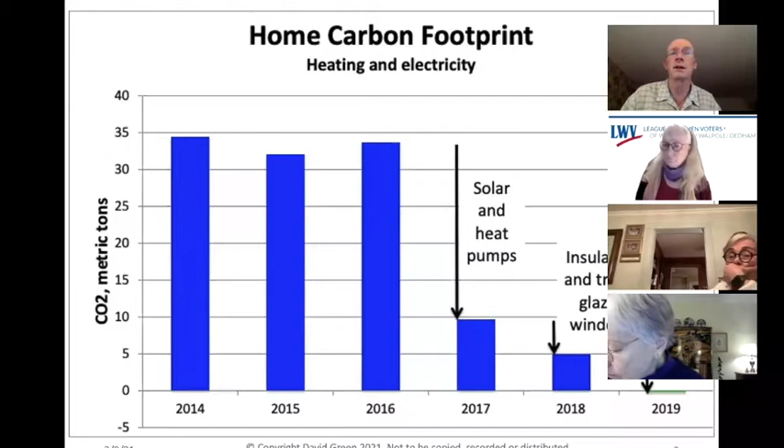Let me show you what happened to our heating bills. The previous chart was the carbon footprint, very similar, about $11,000 in the early years, and then with the heat pumps and solar panels cutting it by two-thirds in 2017, again by almost half in 2018, and again it went slightly negative in 2019 because the value of the solar electricity I'm exporting to the grid now exceeds the amount I pay for that small amount of heating oil.

So that's 35 tons gone each year, every year, forever. And $11,000 in my back pocket each year, every year, forever. And that 15% return on investment is forever as well.

Now, you may be wondering, as Claire mentioned, I live in Dover. Dover is a very wealthy suburb, and I have a big house. Is this going to work for me? And the answer is yes.

I have one homeowner who I've been helping cut his carbon footprint, and he's earning a much better return on investment than I am - 46% per year, and he's cut his carbon footprint 38%. This man lives alone in a small house, about 1,000 square feet, on a small income. So this approach works on all houses at all income levels.

So this is big, it's transformative. This delivers the triple bottom line: for the people, because you can cut out asthma; for the planet, you can cut out global warming and the pollution; and the profit for your own back pocket, making money rather than paying money on electricity and fuel bills.

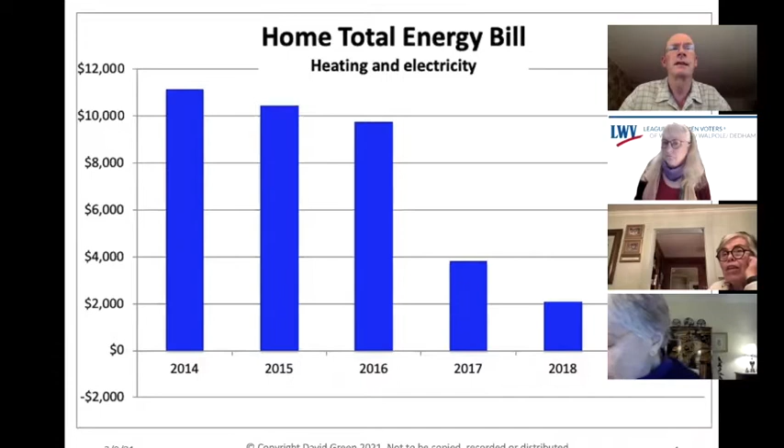So a bit of background - Claire gave you a bit of introduction. I have a degree in physics from Oxford University. I'm a Brit, if you can't tell by my accent. I have an MBA from Harvard Business School, and that's why I came to the States and met this girl and fell in love and been here ever since.

And in my career, I founded and was the CEO of 2 different biotechnology companies. I took both of those companies public. I say all this to let you know I have both the scientific understanding from physics to understand things like the low temperature performance of heat pumps and the low-E coatings on triple glazed windows. I actually understand these things.

And then the financial investment experience to understand things like return on investment and net present value and other things people use to evaluate investments - like all of these, you spend something up front, you get some benefit in terms of savings into the future.

Now, what happened, unfortunately, I was in a very nasty road accident in the summer of 2014. It nearly killed me. And it was while I was at home recovering from that accident that I did the research on cutting my own family's carbon footprint.

Now, both my house and my swimming pool have zero carbon footprints. I'm saving over $11,000 a year on the house and $3,000 on the pool. I wrote one book about each: Zero Carbon Home, Zero Carbon Pool.

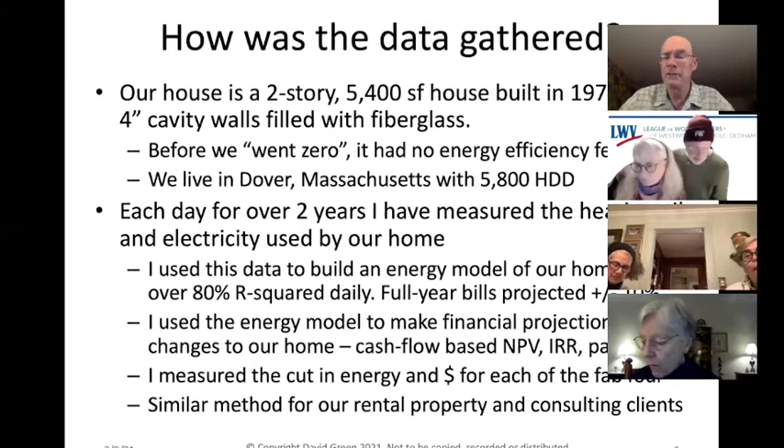So you may be asking, why now? This is kind of odd, having this conversation. We've been talking about this for 40 years now. Well, I think it's very simple. The technologies involved, like insulation, heat pumps, solar panels, and triple glazed windows, have all got substantially better in even the last few years. And the subsidies from government are very significant. So by following these examples, you can cut the carbon emissions from your home to zero, save thousands of dollars a year on heating and electricity bills, and make a good return on your investment.

We have done it. And just in case you're interested, this works on new houses too. I'm working with developers and architects now to develop new houses that will also have a zero carbon footprint and zero utility bills. But most of my talk this evening is going to be on existing houses and what you can do with them, not on new construction.

So how did we cut our carbon footprint to zero? We installed the Fab Four: heat pumps, insulation, triple glazed windows, and solar panels. It's easy to remember because the real Fab Four, the Beatles, had lots of HITS: heat pumps, insulation, triple glazed windows, and solar panels.

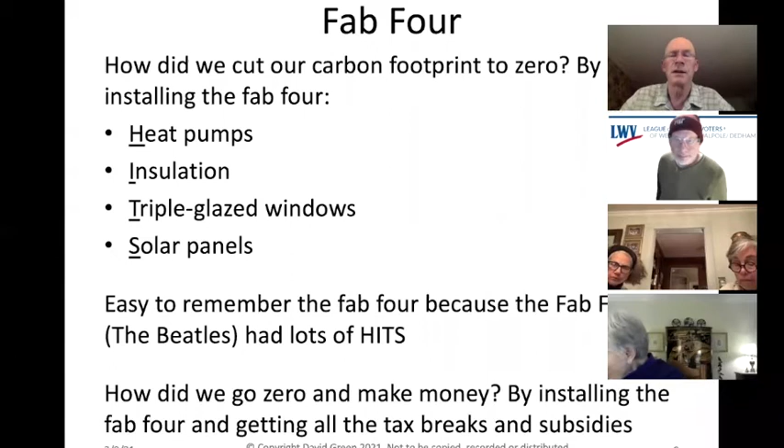So how do we go zero and make money? We installed the Fab Four, and we got all the tax breaks and subsidies. I'm going to go through this one by one, and at the end of each section I'll take a couple of questions from the chat box via Claire. At the end, we'll open it up for live questions and answers, and I'll stay on as long as it takes to get everybody's questions answered.

So these are the results for our heat pumps. This was the biggest single contributor to cutting our carbon footprint, almost cutting it in half, saving us about $3,000 a year. The total investment was about $26,000, paying for itself in about 9 years. That's a return on investment of about 9%, and that's 9% after tax.

To compare this to a stock market or bond market investment, which is taxable income, you'd be looking at an equivalent investment of maybe 12%, 15%, or even 18%. This is clearly a very good return on investment compared to investing in the stock market.

In addition, an article published in Nature Energy, one of the most important academic journals in the energy field, just last year, showed that by comparing similar houses, some with heat pumps and some without, they could determine the price premium for having a heat pump. It turns out that's about 4 to 7%. This is often more than the cost of installing a heat pump, which means you no longer have to wait that 9-year payback period to get your money back. You can get it back as soon as you sell your house.

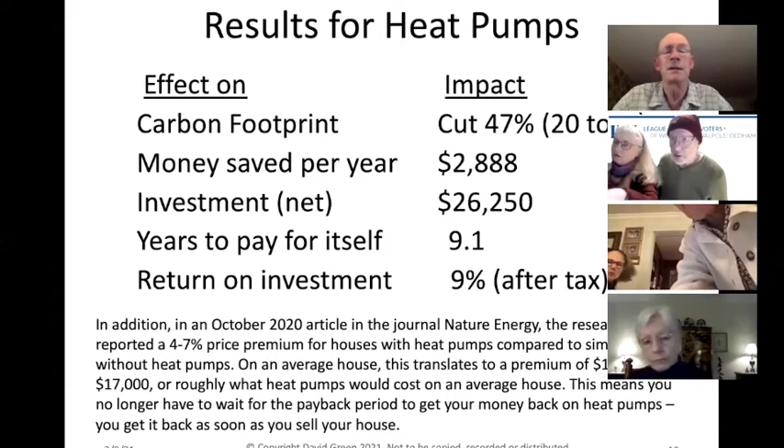So this is a picture of our heat pumps. If you're thinking, well, they look just like our air conditioning units, you're right, they do. And they do air condition as well. These cool my house in the summertime, but in the wintertime the circuit is reversed, and instead of pumping heat out of the house, they pump heat into the house. I'll show you how in a minute.

When they're in heating mode, they heat with 2.5 times the efficiency of a furnace or a boiler. Doesn't matter if the furnace is natural gas, heating oil, or propane, heat pumps are 2.5 times as efficient. They cool with the same efficiency as an AC unit, so there's no benefit there, but it's when they're heating that the magic kicks in, and you get that 2.5 times benefit compared to burning a fossil fuel.

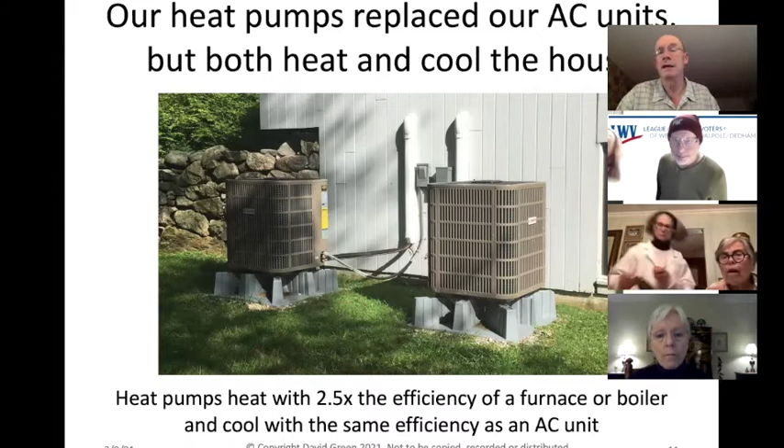Let me explain how heat pumps work. This is sometimes confusing to people, but it really doesn't need to be, because everyone is already familiar with heat pumps, since your refrigerator is one. What your refrigerator does is move heat from inside the refrigerator to outside, where the kitchen is. If you put your hand down the back of the refrigerator, you'll find it's warm. That warmth is the heat that was in your milk, removed from the milk, cooling it down, and dumped out the back of the fridge and dispersed to the kitchen air by that long coil of black metal pipes at the back.

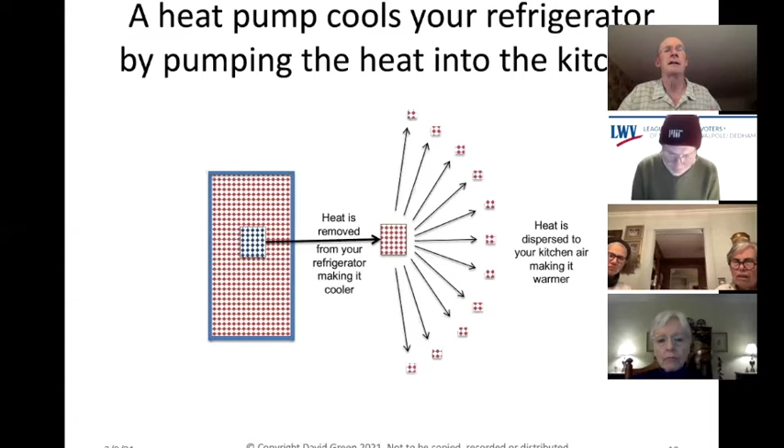It might be 70, 75 degrees inside the house because you've cooled it down to that temperature, but over the condenser unit of the air conditioning unit outside, it may be 110 degrees. It's really hot, because that's the heat that was in your house that's been moved outside by the heat pump, and that heat is then dispersed to the outside air. That's how the heat pump, known as an air conditioning unit, is used to cool your house in the summertime.

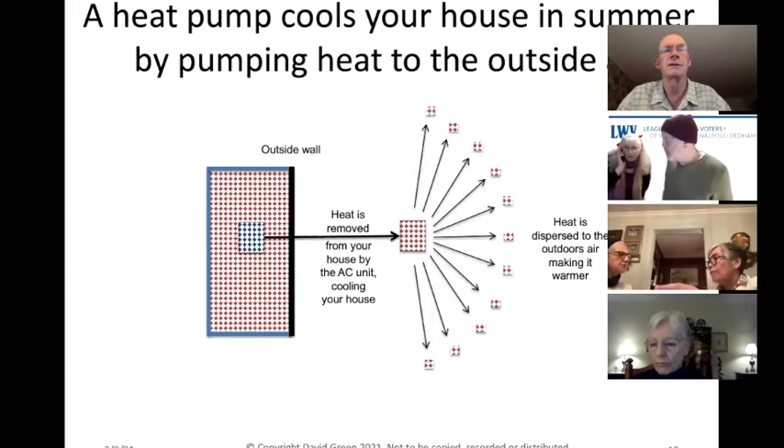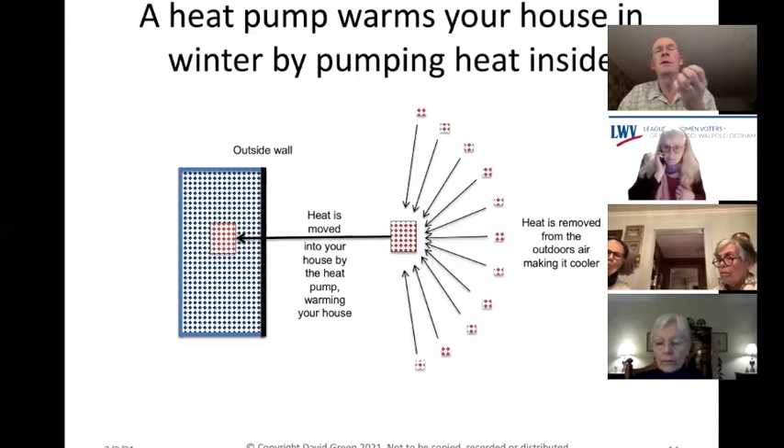Now in the wintertime, just imagine reversing that circuit, and instead of cooling your house down, it cools down the outside air, making it colder still, and putting that heat into the house. This is a heat pump working in the wintertime to heat your house up. So this only works because it cools down the outside air. This is a little bit counterintuitive, because the outside air is already cold. So if it's cold, people think, well, how can there be heat in it? Well, there is a lot of heat in it, and you can remove it, but only by cooling down further that outside air.

So if you look at this picture, that's me on the left with an infrared thermometer, and I'm measuring the temperature of the air going into the heat pump in the wintertime. You can see it's a very cold winter's day, 4.7 degrees Fahrenheit, very very cold, and there's snow on the ground. I'm wearing skiing gloves. Now on the right-hand side, you can see I'm measuring the temperature on the outlet side, above the heat pump, and it's a stunning minus 19.6 degrees Fahrenheit, unbelievably cold. In fact, if you were to put your hand over this, you would get frostbite.

So that's how you can see the air, even though it's cold, is being cooled down further still by the heat pump, and taking the heat from that air and pushing it into the house, making the house warmer on the inside. This is how heat pumps work to heat your house in the wintertime.

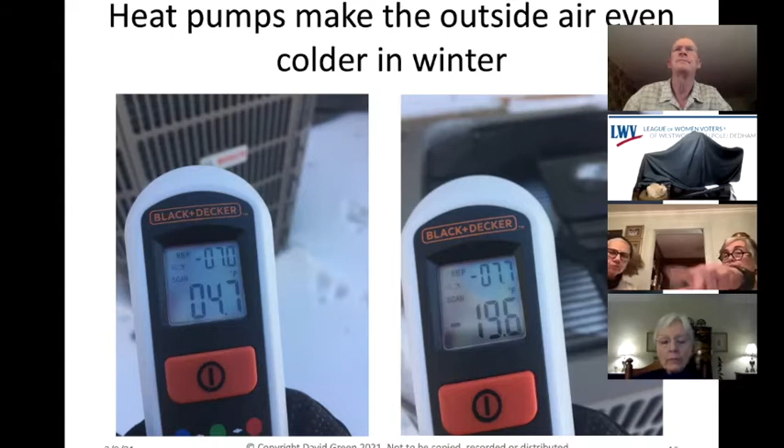Now that was a ducted system, so our house has ductwork that already existed prior to putting in those heat pump units. And this is now showing our rental property in Dover, which did not have any air conditioning at all. So we fitted air conditioning, but not by adding ductwork, which would be very expensive on an existing house.

We added it with what's called a ductless mini split heat pump unit. You can see the outside unit here on the left, and on the inside, it's a ceiling mounted unit. These are often mounted on the walls or sometimes on the floor. I paid extra to have these ceiling mounted units because I think they look nicer, but it's as simple as that—you can get them to mount on the wall, on the floor, or in the ceiling.

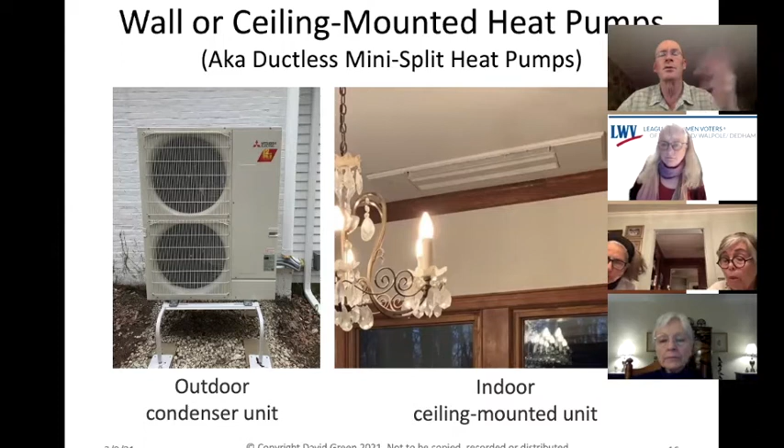I do not recommend geothermal. Geothermal is sometimes known as ground sourced heat pumps. The heat pumps I was describing are air sourced—they take their heat from the air outside. Geothermal will cut your carbon footprint, no doubt, but they're too expensive compared to air source heat pumps. We had a quote for geothermal on our house—it was $98,000 compared to the air source heat pumps at 25,000, so 4 times the cost. Even though they are somewhat more efficient, they're not efficient enough to compensate for the high upfront cost.

Now air source heat pumps—I mentioned at our house we have ductwork to circulate the air, so it's a forced hot air system. At our rental property, we have those ceiling mounted units which circulate warm air around the house. If you don't have that, if you have radiators and forced hot water, you can still get a heat pump to heat the water going around the radiators. It's just from a different manufacturer, that's all.

And they will also work for swimming pools. I have a heat pump for my swimming pool—it greatly cut down, in fact cut down to zero, the amount of propane we've been using to heat the swimming pool. And also for your hot water tank, you can now separate your hot water tank from your heating the air system, from your furnace.

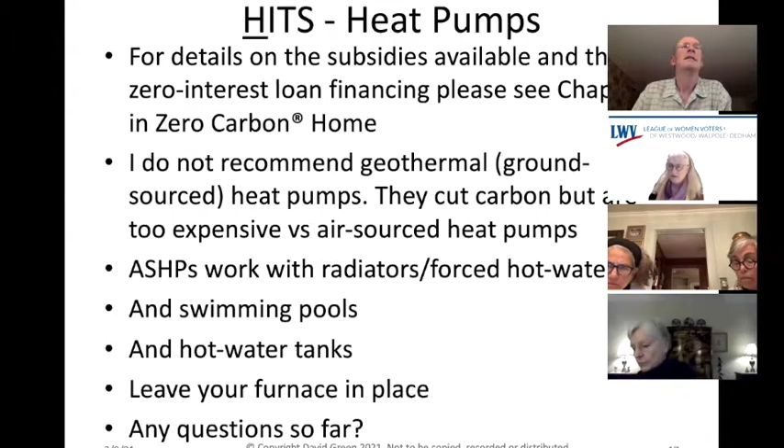So the second section after heat pumps is HITS - it's the insulation in your house. Insulation had a big effect; it cut our carbon footprint about 16%, or 7 tons of carbon dioxide.

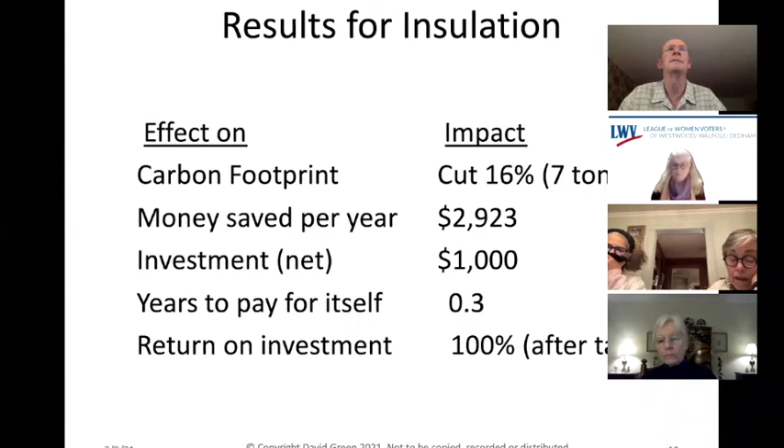And of course, the electric vehicle will cost you $50,000 or something like that, but the insulation cost me $1,000, and it could even be free for you if you're using MassSave. So this is what we did on our house.

We have a flat roof, not a sloped roof, and you can see here the insulation on the roof. There's 10 inches of fiberglass, that's about R30. Insulation is measured in R values, and more is better. Plus 2 ISO boards, those yellowish foam boards on top. This is basically spray foam in a board, you can just nail it down to the rafters, it's very easy to install. That 4 inches is about R20, so a total of R50, which is a very well insulated roof.

On the right-hand side, you can see the ceiling of our basement, where I installed the fiberglass. I just pushed it up in between the rafters there. It stays by itself, it just is squished in between the rafters, so it just sticks there. I put 12 inches in, that's about R38. This is what I bought from Hopkinton Lumber, they actually deliver, which is very nice. And it cost me about $1,000 and cut out most of the heat leaking from the house down to the basement.

That made the basement colder, about 8 degrees Fahrenheit colder, because I'd now insulated the ceiling of the basement, which is totally fine because our basement is not living space, it's storage space. If you have living space, you do not want to insulate the ceiling. You want to insulate the walls and the floor, which is a bit trickier. You may want to hire a contractor to do that, but adding insulation to the ceiling is very easy. I did this myself.

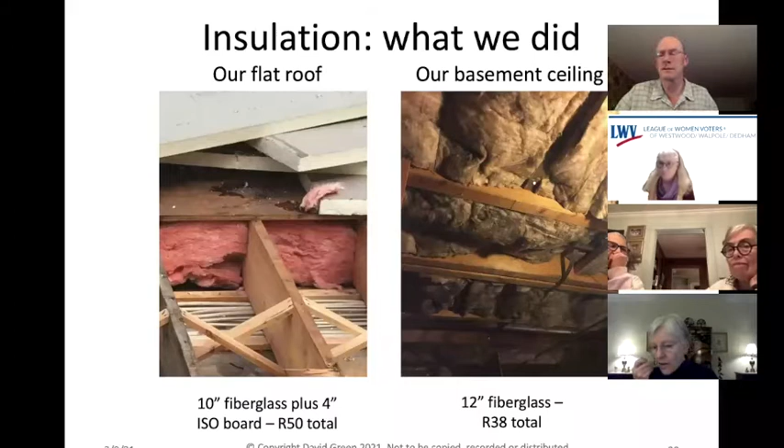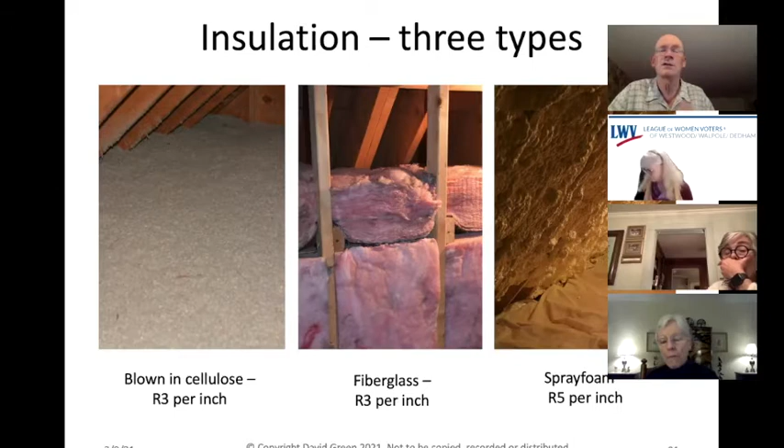Now, it's not the cellulose in blown-in cellulose, it's not the glass in fiberglass, and it's not the plastic in spray foam that insulates. It's the air. Air is a great insulator, and trapping air, just like putting on a big coat in the wintertime, keeps the heat inside your house as well. Now, one thing that people often don't understand is insulation is just as important on hot summer days as it is on cold winter days. Insulation stops the heat from escaping in the wintertime, and it stops the heat from getting in the summertime. So using more insulation actually reduces your electricity bill in the summertime because of the need for less air conditioning, as well as saving on the heating bill in the wintertime.

Now, let me just talk a bit about air sealing. This is basically blocking drafts in the house. Most clients need air sealing. Our house did not need a lot because it's a very airtight construction, mostly because it has a flat roof, and the flat roof has a rubber membrane, which is airtight as well as watertight.

So air sealing can cut your energy use by almost a quarter. This is the experience many of my clients have had. Many of my clients have typical shiplap, overlap siding, or cedar shingles or shakes, and those are very leaky, very drafty, and an average house can lose up to 30% of its heat through the gaps and cracks in those walls. And a major academic study found that insulating the attic in row houses cut the energy use 8%, but insulating and air sealing cut it 18%.

So most houses are going to need air sealing and insulation, just our house did not. So I definitely recommend that you do air sealing at the same time as you do insulation. Most MassSave contractors will do both at the same time, they'll come and do the installation for you and do the draft sealing.

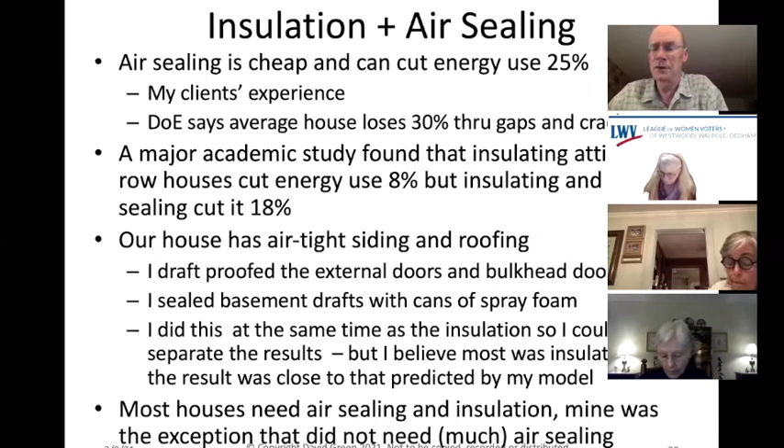MassSave, I mentioned, this is actually out of date. They used to pay 75% of the cost up to $2,000. They now pay 100% of the cost up to $2,000. So please go out and get your houses insulated, and ask them to do the air sealing too.

This is a picture of peaches on my peach trees in the summertime. You can see they're so ripe they're weighing down the branches almost to the ground. This is the lowest hanging, ripest fruit in the zero carbon garden, so please pick it by the bushel.

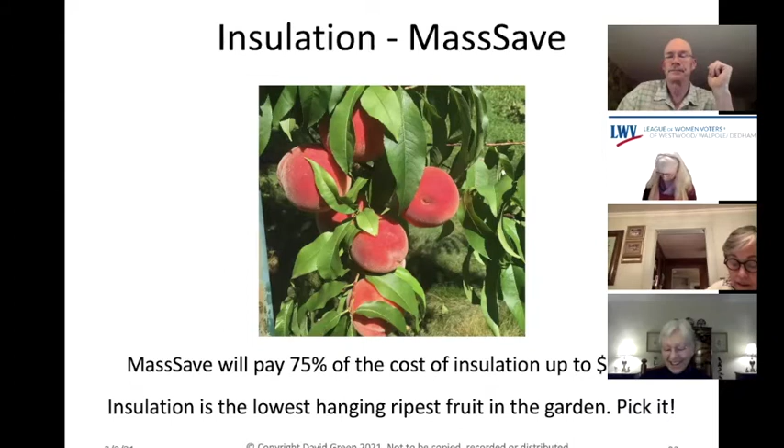MassSave, by the way, will pay for both basement and attic insulation. Sometimes you have to prod them - they tend to want to get in and out as fast as possible, and they'll just put spray foam or blown-in cellulose in your attic, but they will do the basement as well. Just make sure you point them towards doing that.

For details of which types to put where, just see this in the book - you'll all get this at the end of the call. If you're not living in Massachusetts, please go to dsireusa.org, where incentives for insulation are listed state by state. So if you live in Arizona or California and you're on the call tonight, please go there to find out what the incentives are in your state.

Now, I do not recommend taking off your siding, thickening the walls with insulation, and replacing the siding. This is actually quite popular in the deep energy retrofit or zero carbon community. It will cut your carbon footprint, just like geothermal will, but just like geothermal, it's too expensive compared to insulating your attic and basement. So walls are often a bridge too far. There are occasions when you can insulate your walls.

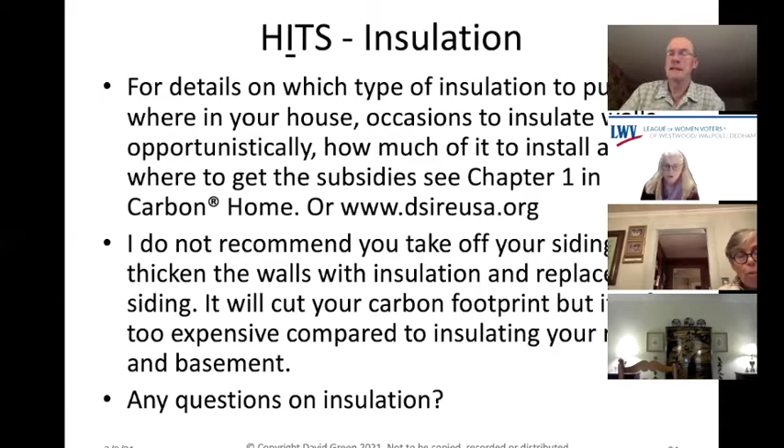Let's carry on then. So T, the T in HITS, triple glazed windows. Triple glazed windows cut about 5% of our carbon footprint and about 2 tons of carbon dioxide, saving us about $1,000 a year and costing about $4,500.

Now this is not the full cost of triple glazed windows. Our windows were ancient and falling apart, I'll show you them in a few minutes. There were literally 1-inch gaps between the window and the frame.

Our decision was whether to replace our windows with double glazed or triple glazed windows. So this $4,500 is the additional cost, the incremental cost, of replacing them with triple glazed windows rather than double glazed windows.

The full cost of replacing windows is not going to pay back for decades on the energy bill. Windows are very expensive. But if you are in a situation where you need to replace your windows, then replacing them with triple glazed makes very good economic sense compared to double glazed.

If you've got perfectly good windows, do not rip them out. It's not worth it. There's something else I recommend instead.

You can actually add a panel of glass from the inside called a window insert, which will make your window effectively a triple glazed window without having to spend the money to rip out your perfectly good double glazed windows. These pay for themselves in about 4 or 5 years, with a return on investment of about 19% after tax.

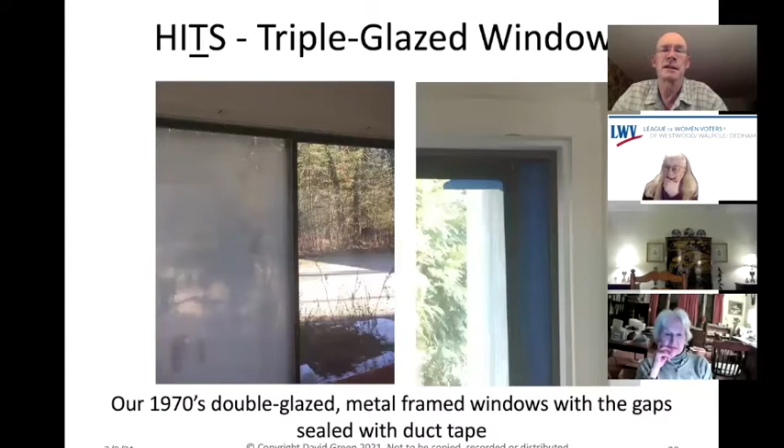So I hope you'll agree the new windows look much better than the old ones, including being able to see out and see the garden, which we couldn't do before because the old windows were all misted up.

So let me explain what a triple glazed window is. A single glazed window is just a single pane of glass, one sheet of glass. Double glazed is 2 sheets of glass with a half-inch air gap between the two. That over doubles the insulation value of the window, halving the amount of heat lost and the dollars being lost through that window. A triple glazed window has 3 panes of glass with 2 half-inch air gaps.

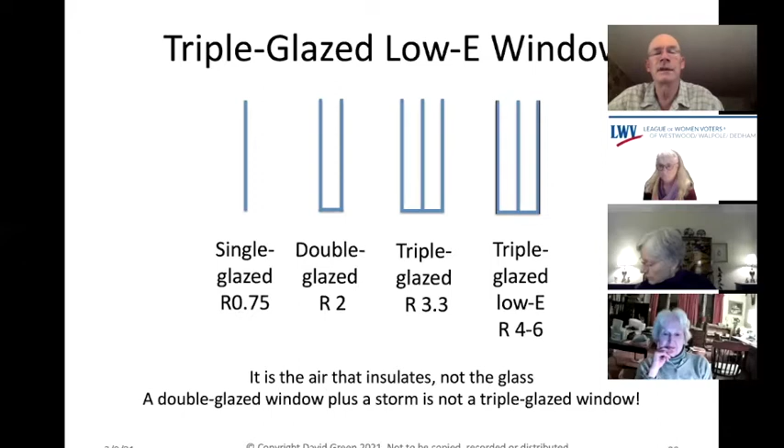In addition, I would get the argon filling. You can often get these windows with either argon or krypton. Krypton is too expensive, it's not worth the additional money, but argon is well worth it over just an air gap. Just remember, like with the insulation I showed you earlier, it's the air that's doing the insulation, not the glass. A double glazed window plus a storm window is not a triple glazed window. In order for it to really insulate, the air has to be sealed, the air has to not move. So a triple glazed window where the draft can blow up the back of it is not a triple glazed window, if you've got a storm window on the outside of a double glazed window.

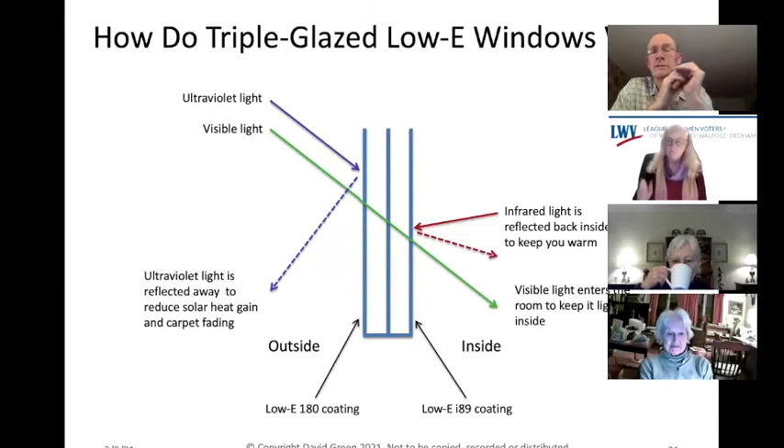Now, that's if your windows are being replaced. You really want to replace them with low-E triple glazed windows, not double glazed windows. But if your windows are in good shape, here's a better solution for you.

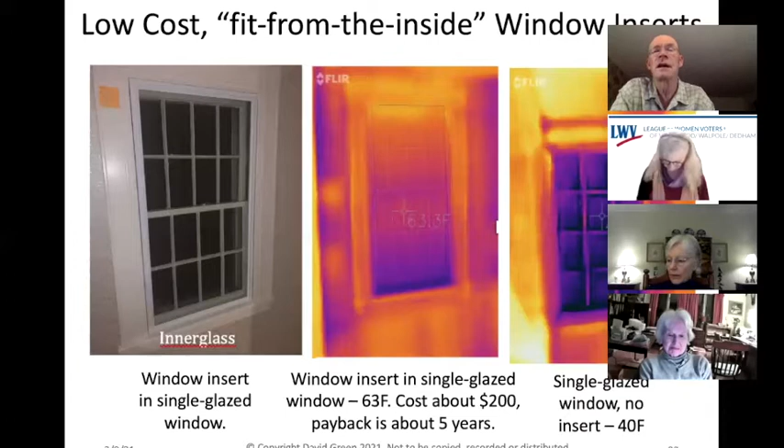So these things are very good value for money. They're only about $200. They pay for themselves in about 5 years, and the difference in blocking the drafts and improving the comfort of the room is considerable.

So for details on triple glazed windows, it's all in the book, including the zero interest loans. And if you're not in Massachusetts, you can visit this website where all the subsidies are listed state by state.

Now, I do not recommend that stretchy plastic film. You've probably seen the stuff. You can buy it at any hardware store. You tape it up with double-sided tape and then use a hairdryer to stretch it out flat. It does work. It definitely reduces the drafts and improves the insulation.

But when you come to take it off, I found the paint comes off with it. If only the paint comes off, that's bad. What happened to me was much worse - the plastic tape came off in my hand, leaving a strip of glue on the window frame. So I now have a nasty, sticky yellow strip of glue on my window frames that I cannot get off, and it's just collecting ants and flies and ladybugs that crawl across it and get stuck.

So I do not recommend that stretchy plastic film.

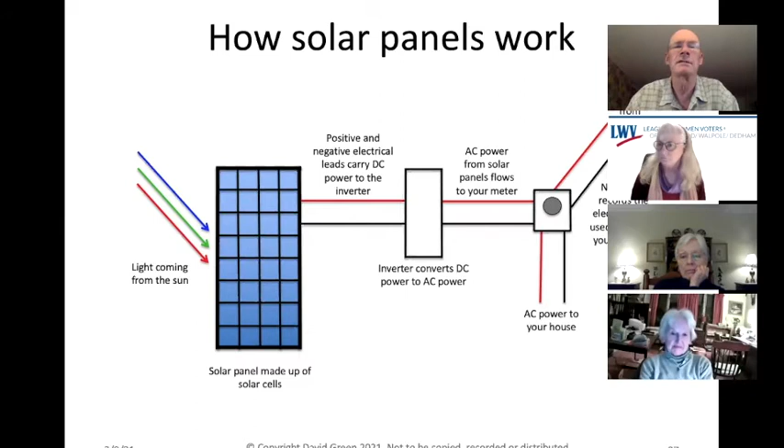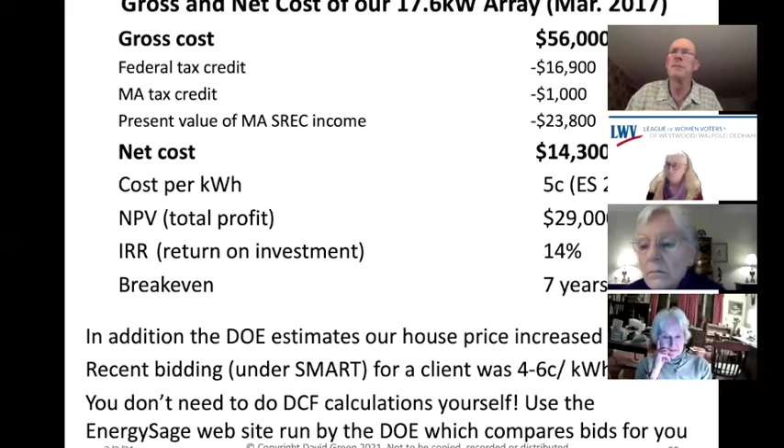I definitely recommend using the EnergySage website. The National Renewable Energy Lab, which I mentioned earlier with their studies on heat pumps, documented a 10 to 20% saving using the Energy Sage website compared to calling contractors one by one.

For details on the lease, loan, and cash purchase options, this is all in the book. Again, if you're outside Massachusetts, if you're in Phoenix, Arizona for instance, go to dsireusa.org.

I do not recommend solar hot water panels. These are quite common in the zero carbon or green building community. This is where the sun's heat is used to heat up the water. The problem with these is they give you massive amounts of hot water in the summertime, right when you don't need it, and no hot water in the wintertime, right when you do need it.

Compared to having solar photovoltaic panels, which produce power all year round, even in the middle of winter, that are feeding a heat pump water tank with its 4 times heating efficiency compared to a fossil fuel furnace, it is much better to have a few extra panels on your roof and have a heat pump water tank as well as the heat pump for heating your house.

Now, for batteries, if any of you are interested, batteries are a very new area. You now get a subsidy under the SMART scheme for a battery. As I mentioned earlier, I'm replacing my backup generators with batteries because the subsidies are now so good that if you install them with an array, the extra subsidy for the battery makes the battery almost free over its lifetime. So batteries are very good value for money right now because the subsidies are so good.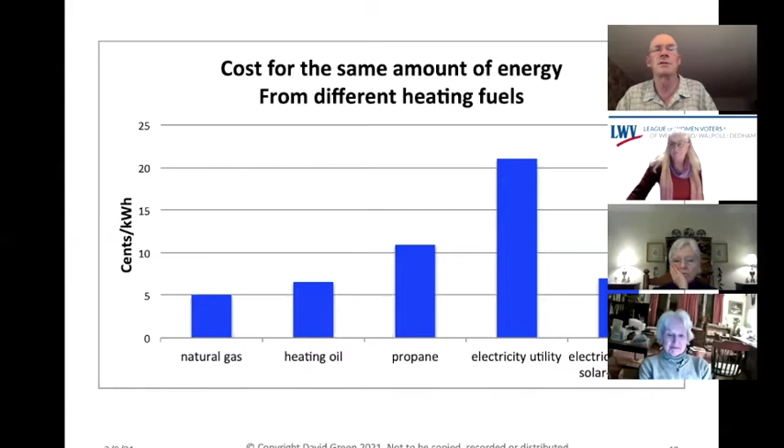So putting it all together, let's look for a minute at the cost of heating your house using different heating fuels. Everyone knows natural gas is the cheapest, heating oil is a bit more expensive, propane is a lot more expensive, and heating with direct resistance heating, like a fan heater or an electric baseboard heater, is the most expensive because electricity is 21 cents per kilowatt hour. And even if you use solar electricity at 7 or 8 cents a kilowatt hour, it's still more expensive than natural gas.

Unless you use that solar electricity to power a heat pump. Remember, the heat pump heats with 2.5 times the efficiency of an electric resistance heater or a gas or oil-fired furnace. So now you're heating your house at maybe 2.5, or maybe less than 2 cents per kilowatt hour of heat in the house. So for the same amount of heat in the house, it's now costing you less than half what it costs to heat the house with natural gas.

So while natural gas has historically been the cheapest way to heat your house, now it's different. Now solar panels on your roof plus a heat pump to heat your house is the cheapest way to heat your house, at less than half the cost of heating with a fossil fuel furnace. This is how we heat our house today, and this is a big part of why our carbon footprint has gone down to zero and our bills have gone down to zero too.

Now, in addition to all of that about money and carbon footprint, if anyone in your house has asthma, then replacing your fossil fuel furnace with a heat pump will greatly improve the indoor air quality. Because even when you have a properly vented furnace, there's still a little bit of burnt gas in the air in the house, which you're then breathing in. Now, if you're cooking on an induction stove, that will also greatly reduce the amount of particulates, nitrogen oxides, and sulfur dioxide in the house. And our indoor air quality is measured using a sensor.

It's from a company called Foobot, F-O-O-B-O-T, costs about $100, and our air quality is consistently excellent. We have an induction stove, and we have no combustion of fossil fuel in the house because of the heat pumps for heating and the heat pump for the hot water tank as well.

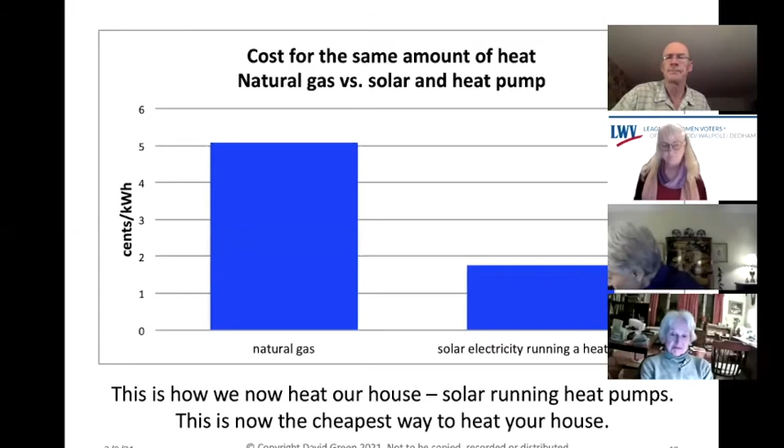Now, that was the cost. What about the carbon footprint? The carbon footprint of natural gas, heating oil, and propane is all about the same, about half a pound of carbon dioxide for every kilowatt hour of heat. Utility electricity is a lot higher because the grid here in Massachusetts, we still burn oil and natural gas to make the electricity.

But of course, solar panels have a zero carbon footprint. So solar panels running a heat pump is now the cheapest way to heat your house, at half the cost of natural gas, and it has a zero carbon footprint.

Let me take a bit of an aside here. Gasoline is also too expensive now to compete with solar panels and electric vehicles. Just yesterday, my wife and I drove to New York City and back. Our daughter's at Columbia University, and driving our Tesla, which we bought a year ago, cost me $8 for the round trip. That's because my solar panels generate electricity at about 8 cents a kilowatt hour. The Tesla gets about 4 miles for every kilowatt hour, so about 2 cents per mile. My BMW, which it replaced, is about 15 cents per mile.

A huge cut in the cost of driving. Even the Greyhound bus costs $26 to go from Boston to New York and back, and that emits carbon dioxide and pollutants every mile of the way, whereas the Tesla emits nothing. And so I really believe it is game over for the internal combustion engine. It's been nice knowing you. It's powered the Industrial Revolution for 100 years, but it's now destined to go the way of the horse and carriage.

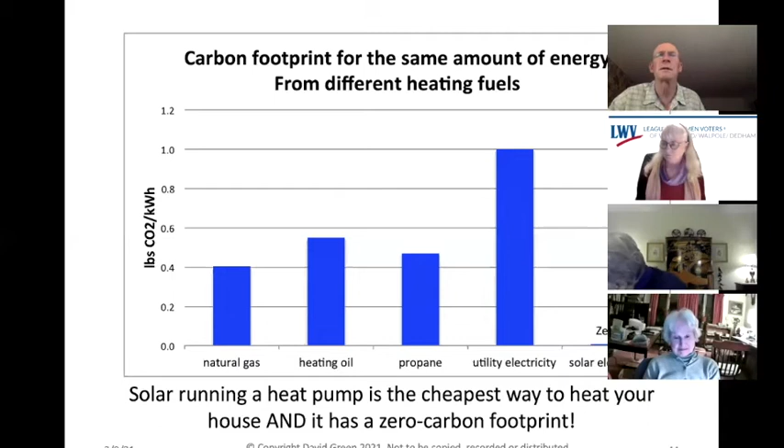So the key to going zero is to cut your house's energy use so much you can generate it all with solar panels from your roof, including the power needed for an electric vehicle if you have one. So you cut it with insulation and air sealing, triple glazed windows, heat pumps, and then you generate it with solar panels on your roof.

This, by the way, is the optimal order. You may remember at the start we did it almost the opposite way around. We had solar panels and heat pumps first, then triple glazed windows, and insulation was the last thing we did. But the better way is: insulation and air sealing first, triple glazed windows second, heat pumps third, and then you'll know how big to make your solar panel array to get to a zero carbon footprint.

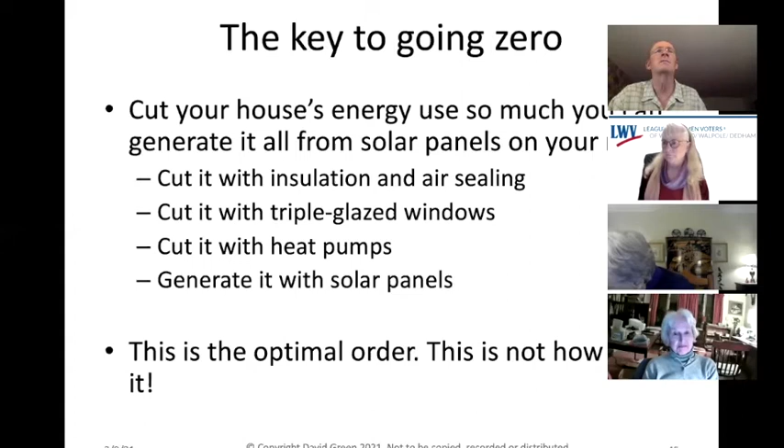Now let me take a quick aside on health. This shows the greenhouse gas emissions and the death rate from accidents and air pollution by different types of fuel. At the top, coal, oil, natural gas, and biomass all have very large greenhouse gas emissions causing global warming, and very high death rates from accidents and air pollution. Look at the bottom four: hydropower, nuclear, wind, and solar—almost negligible. There's almost no greenhouse gas emissions from any of these, and almost no deaths from industrial accidents or air pollution.

So this health benefit of cutting your carbon footprint and cutting your bills—the health benefit is an additional benefit on top of those two as well.

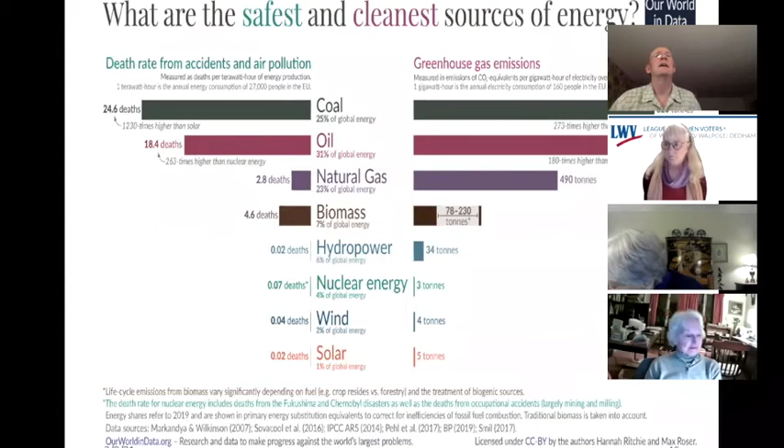Now, the journal Nature, the world's top scientific journal, stated in an article that more than 5 million deaths per year are due to air pollution. So it's not just about cutting carbon footprints and cutting bills, it's also about the health of you and your family. Okay, let me get off my soapbox and get back to saving money.

So let me summarize where we've been today. These slides are in the book, so you don't need to write it all down. The total savings were over $12,000 a year, and over 43 tons of carbon dioxide per year. These charts are in the book. So you really can save money while helping to prevent global warming and improve your health as well.

Now, this was very clearly illustrated during the COVID lockdown. In the UK, the British Lung Foundation surveyed a bunch of people—2 million people experienced improved lung function because of the reduced pollution from burning fossil fuels during the COVID lockdown. So if cutting carbon footprints was a drug, it would be instantly approved by the FDA.

Why? Because it has widespread health benefits and zero side effects. It really is a wonder drug that should be prescribed for everyone. In addition, this health burden tends to fall disproportionately on poor people, people of color, and those with disabilities. So by cutting your carbon footprint, by installing the Fab4, you can save money, save the earth from global warming, save lives, and even help reduce inequality.

So everyone really should be installing the Fab4. It delivers the triple bottom line for the people: zero pollution for the people, zero carbon for the planet, and zero bills for your profit in your back pocket. So you can do this on your own home, or on new construction, as I mentioned.

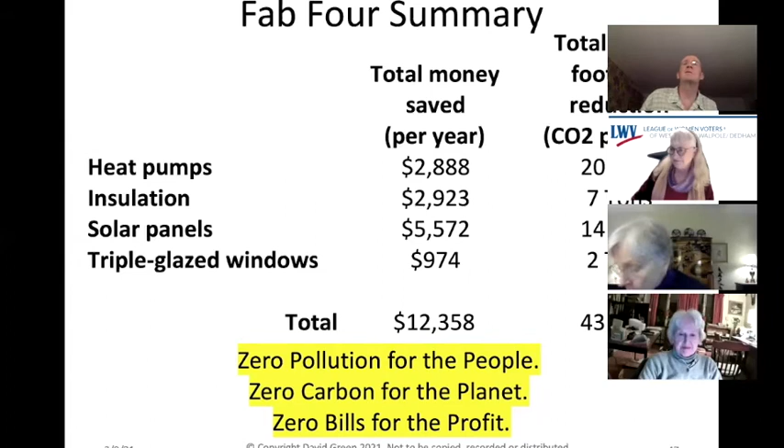So you really can cut your carbon footprint to zero, helping to reduce global warming. You can save money for college, for retirement, for a vacation, whatever you want. We've been earning a much better return than in the stock market. And you can even increase the price of your house instantly—you do not need to wait for the payback period to get your money back. So zero carbon, zero bills, zero pollution. The healthy zero carbon future is here, but only if you actually do it. And the clock is ticking. So please start today.